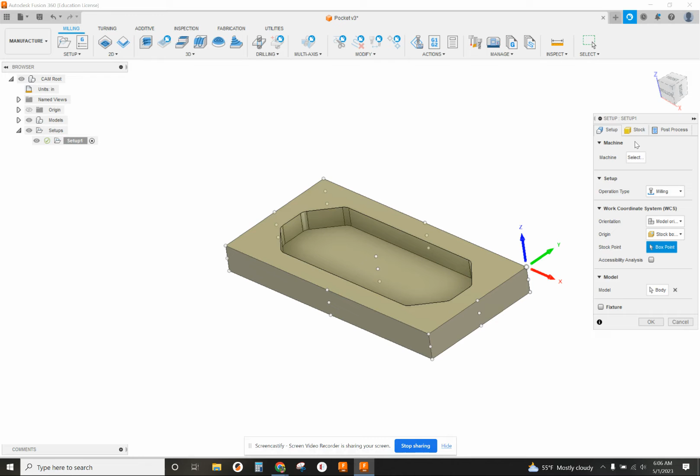Okay, I've already got my setup, but I'll go over it with you. We've got our datum on the upper right. Notice how the Z is pointing up and away from the flat part of the stock, and the X is to the right. So that's oriented properly. Also, I've got no additional stock in my stock offset mode. All right, we're just doing this pocket, so we're not worried about anything else.

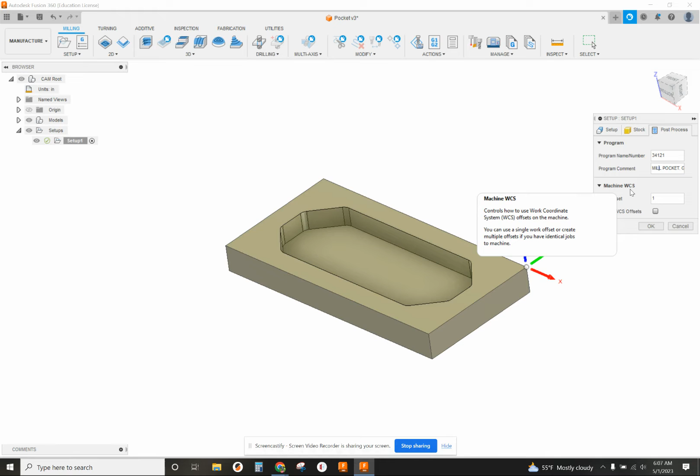In the post processor tab, I do have my program name, a number, and I've got a comment. It tells me mill pocket G54 upper right. And then my machine work coordinate system, the WCS, is set at number 1. That'll output a G54. So that's all good. All right. In the tool library, I've already got my half-inch two-flute end mill set in there, so I'm good for that. If you don't have that done, please make sure you have that done.

Now we're just going to click on 2D pocket. I'm going to select that tool and then click to the geometry tab and click on the bottom of that pocket for the pocket selection. All right, so it should turn blue. On the heights tab, you shouldn't have to change anything. You should be fine with that. Especially the bottom height, it should say from selected contour 0 offset.

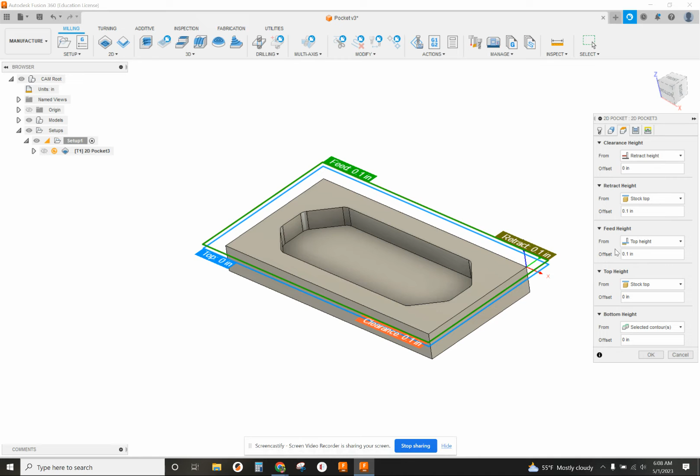Now on the next tab for the passes, we do want to make sure that there's stock to leave, so check that box and make both of these values 10 thousandths. So radial stock, that's on the side of the tool, and axial stock is on the end of the tool, so up and down. All right. Maximum step over should be 10% of your end mill diameter. I have a half inch or a 0.500 end mill, so 10% of that for a maximum sideways step over is 50 thousandths, 0.05.

Last thing, very important that we do this, if we go way down where it says ramp type is set to helix, I want to change that to profile. Helix will make it spiral down in one spot. If we use profile, it'll go back and forth, slowly ramping in, and we'll see what that looks like. It's a nice, easy transition into all this stock that we're roughing out, and it tends to not clog up the tool. So I'm going to click on OK.

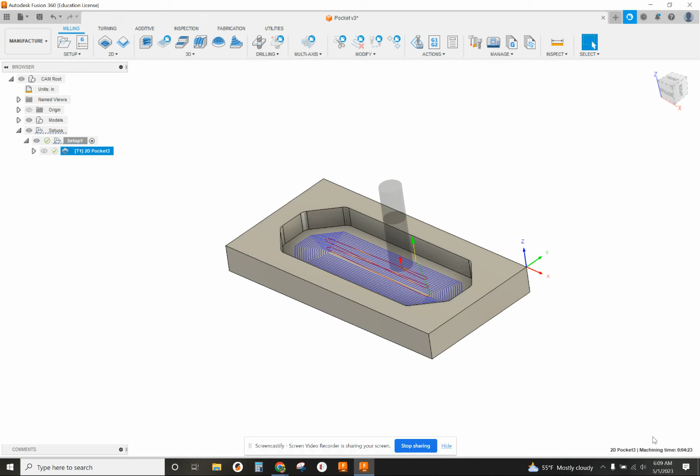And that, to me, looks good, but I want to double check it, so I'll simulate it. And we'll go fairly slow so we can see what that ramp in looks like. So when we do that profile ramp in, notice how it's getting deeper and deeper as it goes from side to side until it reaches its final depth, and then it'll take sideways 50 thousandths at a time and keep stepping over and going back and forth until that's all done.

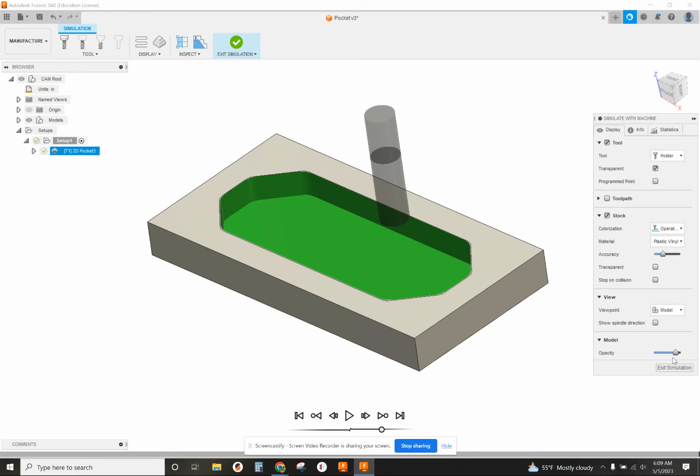All right. Once that's all done, we still have our additional 10 thousandths stock on the side and on the bottom. So we're going to have to go ahead and do another pocket. So all I got to do is click 2D pocket. And this time we've already got the tool selected, so we're going to select the pocket again. We can skip over our heights and go over to the passes tab and make sure we uncheck stock to leave. We don't want any more stock on there. We want to finish this off.

Also, our step over is going to increase. You don't have to take small step overs with this finish pass. We can take a little over 50% of the width of the tool. So we have a half-inch end mill. This is set at 300 thousandths step over. That looks good to me. That should blend in fine.

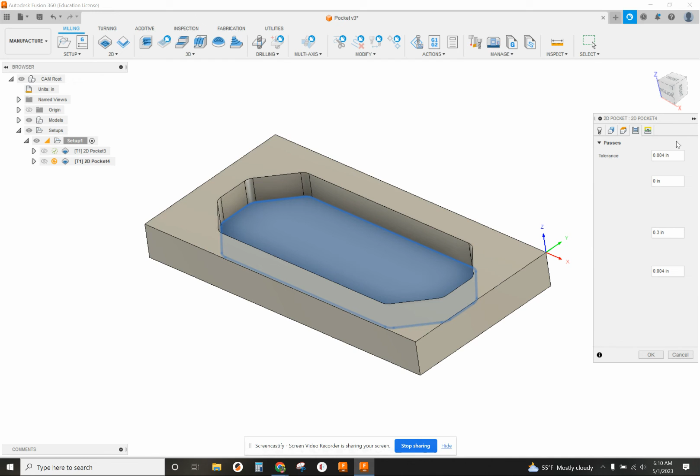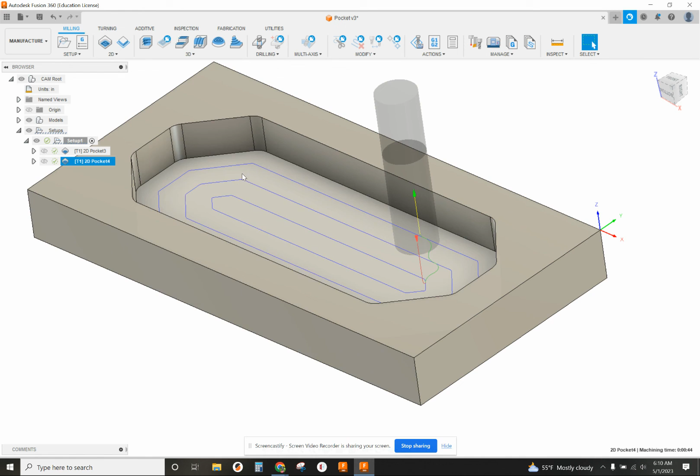And then the last tab, the ramp type, we'll set it to plunge. It'll just go straight down. And then click OK. And that looks good. It goes straight down into the pocket and then steps around 300 thousandths at a time.

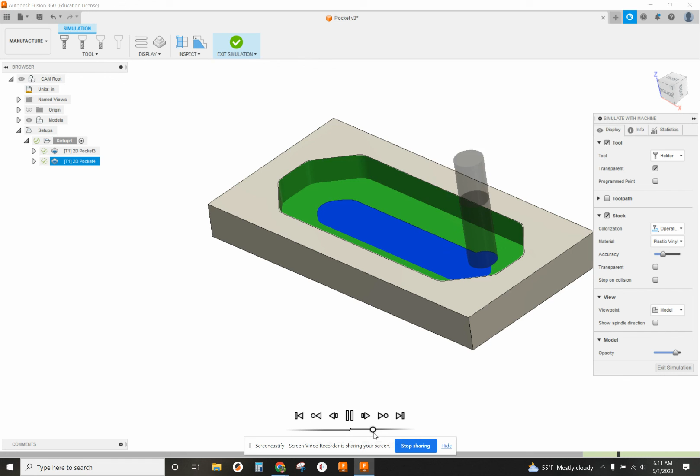I'm going to go back to setup, and I'm going to simulate the whole thing. So as you can see, we're doing our rough pass here, and we're getting close to the finish pass. See, watch what happens here. Here goes the finish pass now. Plunge down. Now it's stepping over 300 thou at a time. And it's doing the final pass around there. And that looks good to me.

So now all you have to do is post-process, and you'll be fine. That's how you do pocketing.